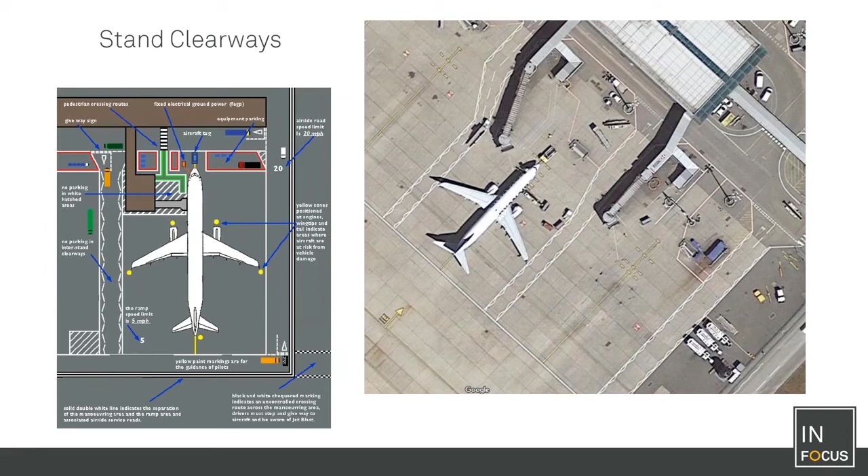So there's always a way to get to and from the aircraft from the side, at least here. This is something I've had a lot of good reports come back about, the advantages of having these routes. Of course, it has done restrictions in other locations.

So just looking at a scenario here, ground service equipment as provided by the aircraft manufacturer. When you work with our product AviPLAN, for all aircraft where we have information, we provide a service arrangement which is analogous to the service arrangement you find in the ACAP, the information the manufacturers give us. Remember, it's just an example, something that can be done, not a must. This is up to us in the planning stage to get the information about what's going to happen on the ground and what vehicles will be provided.

And here this is the A320neo series. There are actually three different scenarios offered in the ACAP, but we're just looking at two here. There's one with passenger boarding bridge involved. Here I've done an open layout where we've got passenger stairs, so it's going to be walk or bus boarding. You'll see they've done the opposite to me here - they've set water to the left of the aircraft and lavatory to the rear.

You'll also see on the right-hand side, not only is dispenser fueling being shown here in this display, which might not be the case at the airport where you're working, but there are container and conveyor belt loading being done at the same time. So you'll see two different types of tow trucks or trains coming in. Here it's marked as bulk, and this is going to be loaded over the conveyor belt. Then I've got container stuff coming in on the LD3 dollies front and back to the high loader or container loading device, which is going to be used at the front and rear of this position.

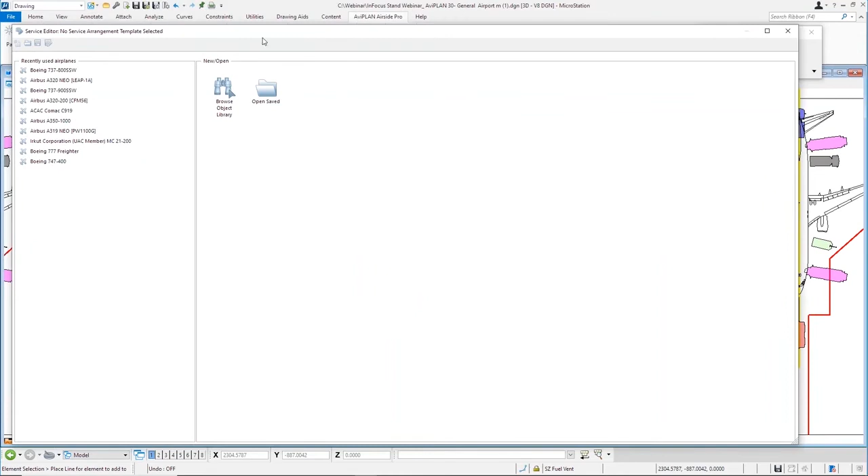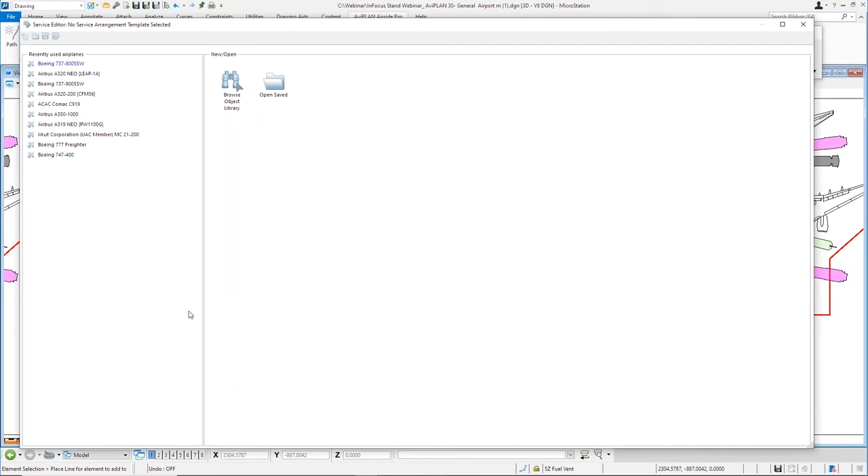And when I open this tool, it's basically like a small CAD environment, if you will. I've got a list of last used objects on the left-hand side here, but I can also grab anything out of our extensive library from AviPLAN. But let's stay with the known object at the moment. I'll select the 737-800 winglet from my list, and you'll see we've built this up based exactly on what we saw previously in one of the slides on the 737-800.

As the standard or a possible service arrangement, as a rule we have both in as standard here. You get to decide - instead of having to search and look for it, we have a compatible conventional or tow-barless truck at the front. If you choose one or the other, I'll remove the tow-barless object there.

When I'm looking at this picture, I also see that here, as I showed you before, lavatory and water are in the same location. I'll just click on this one here and it tells me that's the water, so I'm going to move it. By right clicking, I can just move my water vehicle to the back, and I can rotate it and place it down here and say okay, this is where I'm going to be using my service arrangement here.

I'm going to move this one a little bit further away from the wing, a little bit closer to the stairs. Again, these will be arriving and departing in sequence, not at the same time.

Loading this particular vehicle, you'll see my loading doors shown down here on the left-hand side, and I see baggage trains, each only showing one baggage cart on it, which is usually unlikely if the aircraft's traveling with a full load.

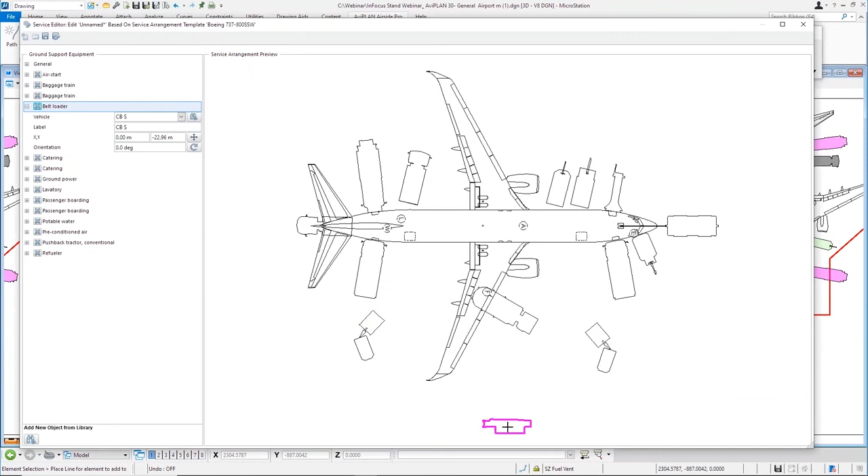There are a number of different belt loaders, manufactured and generic models, in the AviPLAN library. I'll place this in a location and say okay, this is my belt loader in its location for loading the rear. I'll add another belt loader to the front.

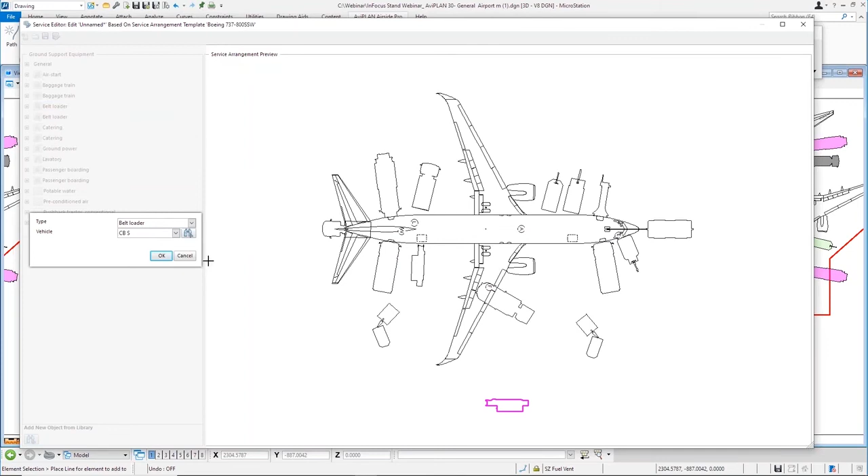I could have selected perhaps a longer one for the front to help avoid the catering situation there. I can still change this at any time, because I'm creating this as a template. I can continue and make variants of this service arrangement, which I can apply to any aircraft in one of my planning scenarios.

Also now here, I'll take a look at the carts, and before I change anything there, I will add another cart to both of those, and I will also change. So I see they're quite wide.

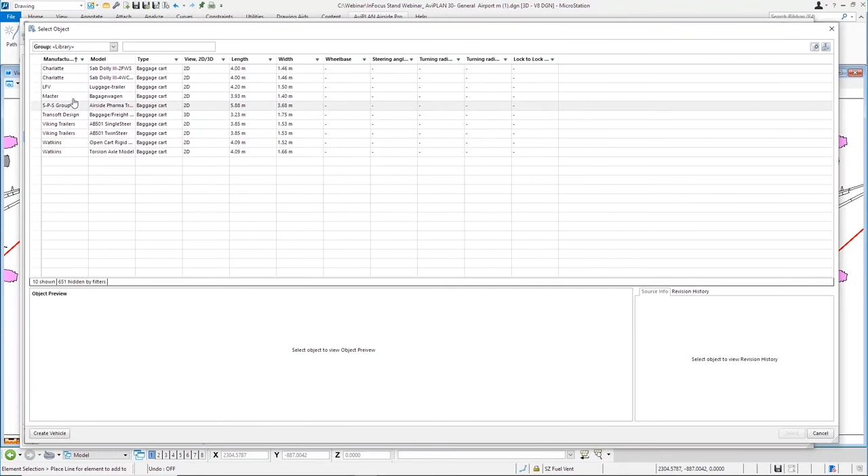Those are probably more likely a cargo dolly as opposed to a cart, which would be a little narrower. The narrowest I've got on my list is this one here. I'll select that and place those there instead.

So these are more typically baggage carts, and I'll relocate that there. I'll leave that one there for now. And also at the back here, for time's sake, I'll just add another 2 to this one.

I can rotate those either manually, or I can enter angles here, depending on how I wish to work, or what I'm trying to achieve here.

Again, I can just drag those in a collective way, move them across and place them here somewhere like this. One last move to rotate - that means 2 last moves.

Depending on the type of aircraft here, you'll see that these are probably, to get in this position, they would have had to come in underneath the wing. Might be possible, might not.

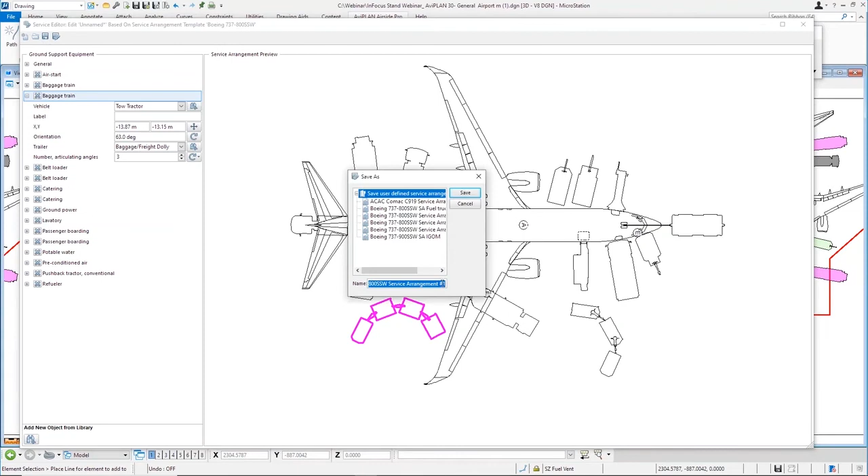So in these situations, when you're planning this scenario, you have to allow that the vehicle, the baggage, will be towed in to a distance close to the belt, and then discoupled or left behind. The tractor will head off, and the actual baggage containers have to be pulled by hand into location. These are scenarios which are difficult for us to simulate with the software, but it's still important that you get this information before you go out and do this type of planning work.

I'll just save that one. I've just saved myself a new template for that. I can use that template over and over again, and I can also share it with other colleagues to do this type of work.

As we say, basically every stand is an individual. Now, you'll see in this screen now on my AviPLAN screen, there's a mess of equipment there.

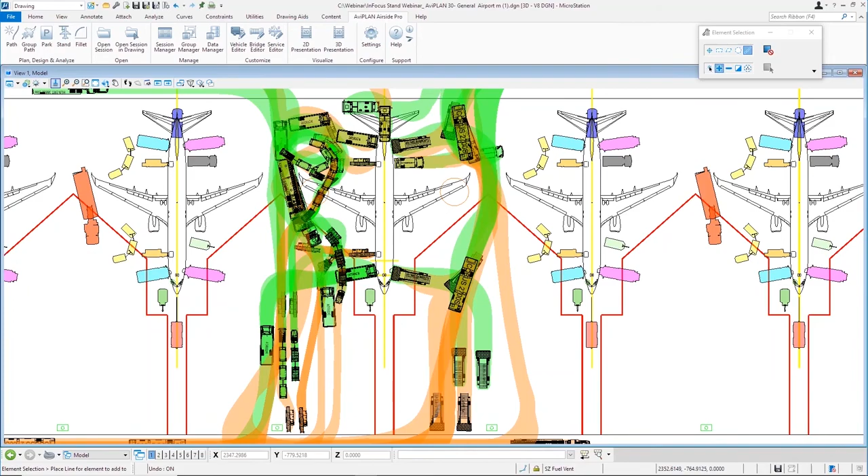What I've actually done before the show was I went to the ACAP again for the Boeing 737-800 as an example, and I took a look at one of these turnaround time schedules as provided by the manufacturer, to give the operator some feeling for how much time is going to be required.

And here, of course, they're just talking about the time, but we need to be able, as the planner, to also check the sequencing of this time. Is the room there? Is the geometry suitable at the stand to follow this time schedule? Can I adjust the time schedule to make things easier and more functional at the stand?

And as I also make quite clear, disclaimer that this data is only to illustrate the general scope of the tasks involved, and it will in every location end up being something completely different.

What I did was I modeled this in AviPLAN following that schedule, and basically it's 99% the same as that schedule which you saw, which runs for about 35 minutes in itself. This is running now, the AviPLAN presentation which I've put together, running at 20 times real time at the moment.

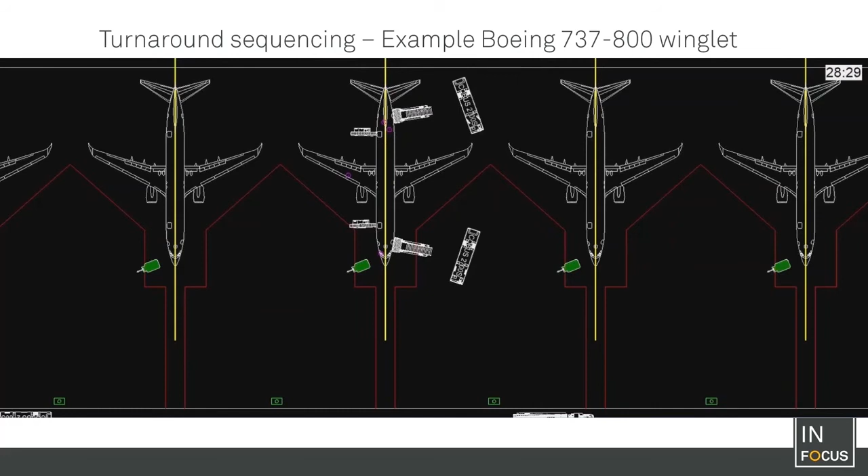You might have noticed that the caterer services both front and back here at this stand. This is quite often the case. Depending on the service which the airline is offering, many low cost carriers don't offer a lot in the way of catering. They only sell cold packaged stuff on the aircraft. Others do a whole different service.

It can be that, because of the distance between the stand and the catering facility, it's a long way, so they're going to send a larger truck so they can service more vehicles while they're out doing that. Make sure you know what size the catering truck is, because this can block other loading processes if they're there at the same time.

When you've done this type of video as well, you can actually slide it around. You'll see this on your screen now, that the videos do bring a lot more than just a nice something to play back. You can watch processes a little closer.

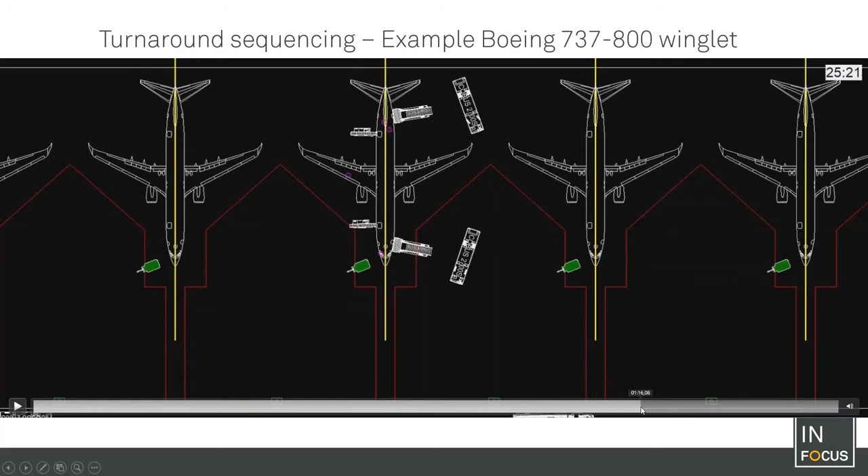This is, of course, now online, not all going to do the way I'd like to have it, but you can use these videos to get a better idea of what's happening, help you design permanent storage areas at the stands, as well as which areas need to be kept clear for maneuvering.

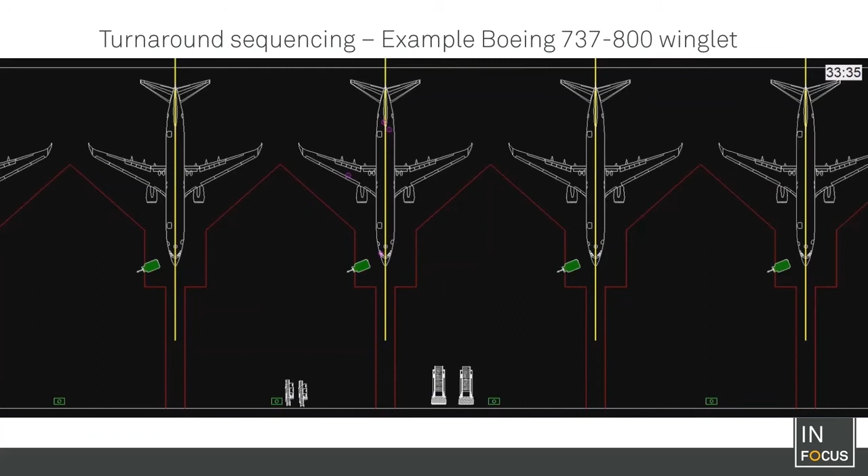And when we look at maneuvering, I want to go forward here, go back to our schedule, which we've taken from the ACAP, and just showing, this is again just to demonstrate to you what options you do have in AviPLAN.

Here, I've just done a screenshot of all of those aircraft, of course, no longer sequenced, only that I've changed the entering paths are shown in green here, the exiting paths in orange.

By doing these movement maps, you can also help identify locations for planning permanent storage or locations that need to be kept clear for movement at certain times in the process.

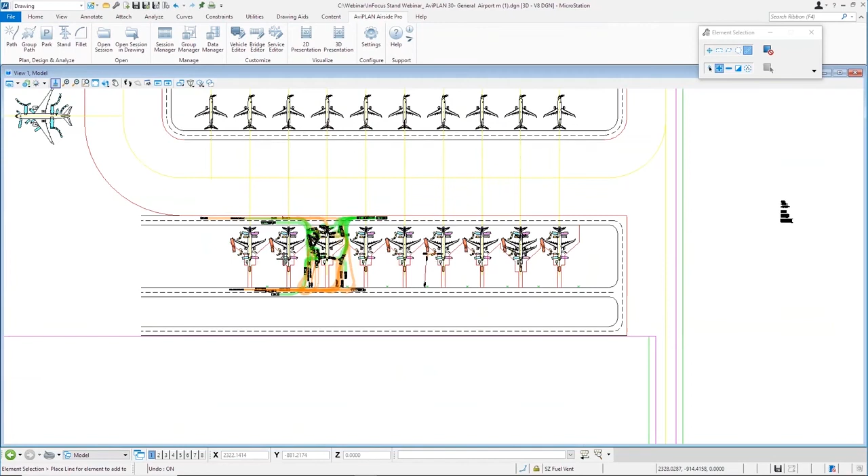To produce that video, though, I'll give you a short insight and some tips on working with ground service equipment inside AviPLAN.

And we'll just do a simple path, the same as what you would with an aircraft. I'll select here a short conveyor belt. It's the same conveyor belt which I've used here, and you'll see that my service arrangement which I created to do this exercise, I've also color-coded the different equipment.

There's also a tip: you can do fantastic things with your ground service equipment schematics in AviPLAN, so that you could do this with color coding, and you could have in your Gantt chart, for example, also color coding shown to show which aircraft or which vehicle type is there, at what time it's arriving and leaving. You can make things a little bit easier for people who are less technically averse in this type of thing.

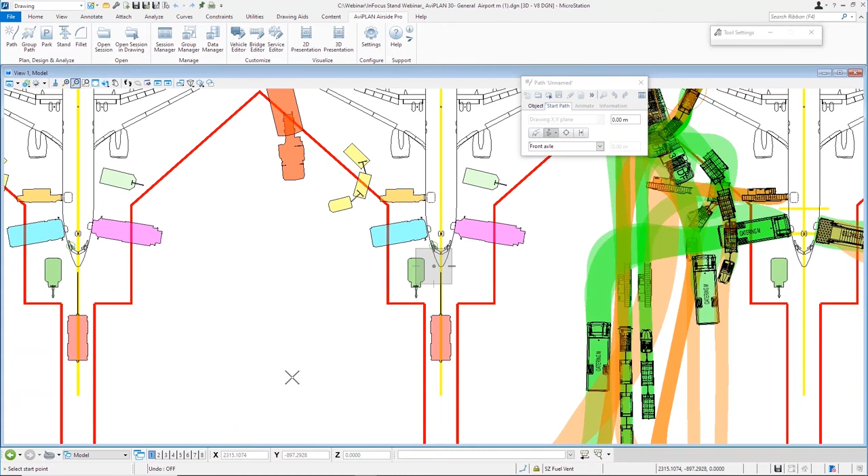So I'll start with this one here, and I'll place the vehicle. Whoop, sorry about the zooming problem here. I was going to place it down here near this floodlight post, because maybe it's an electrical unit that needs to be charged.

I'll come up through the middle of this area, assuming that left and right I've got maybe some permanent storage areas. And you'll see that when I want to move it, it's turning quite a large arc here at the moment. Always make sure you don't need to stick to the default speeds that we offer there. These things are flexible inside AviPLAN.

Okay, I'm just having delay problems on my screen for some reason here today with the web connection.

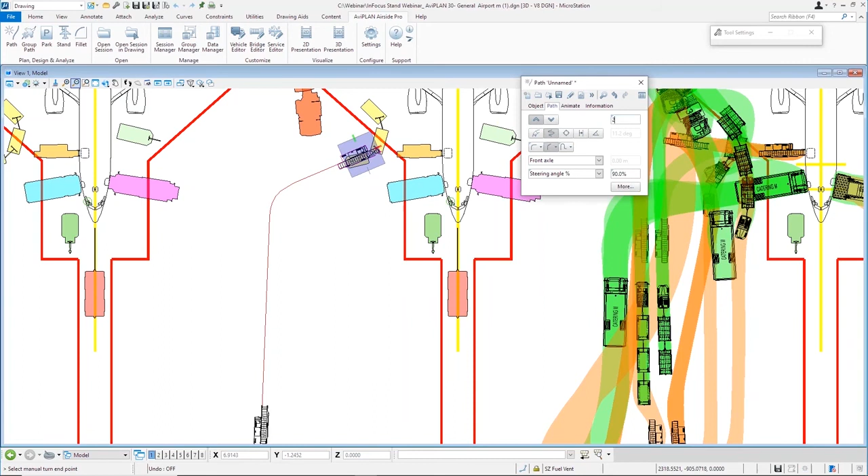So I'm going to move over here a little bit quicker, and say this is my pre-positioning position. This is the belt loader, one of the very first equipment that comes to the stand. From there, I might go down a notch with speed, then zoom in and move over and park around about on the same location here.

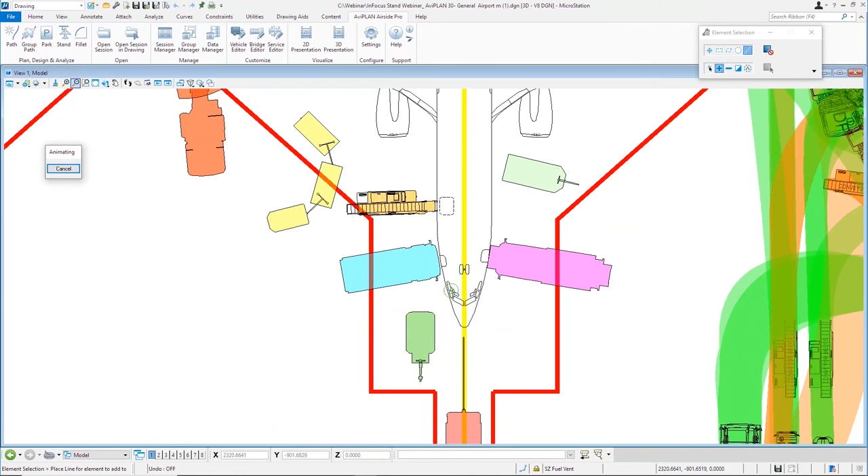There's always going to be slight discrepancies here; this is not millimeter-exact in the planning. So this has brought me into the position, and you'll see that I can also animate that if you want to see paths, and animate just those two segments to show the vehicle move in and come into its docking area. Then it will be serviced.

I could do continue, and when you do this type of work, always just follow the sequence, make one thing after the other, and build it as you go into a presentation. Makes life much easier if you do the whole thing in sequence as you go through it.

For example, I've done this one entering, so I'll save that one and name it 'enter', and then I will directly start a second session.

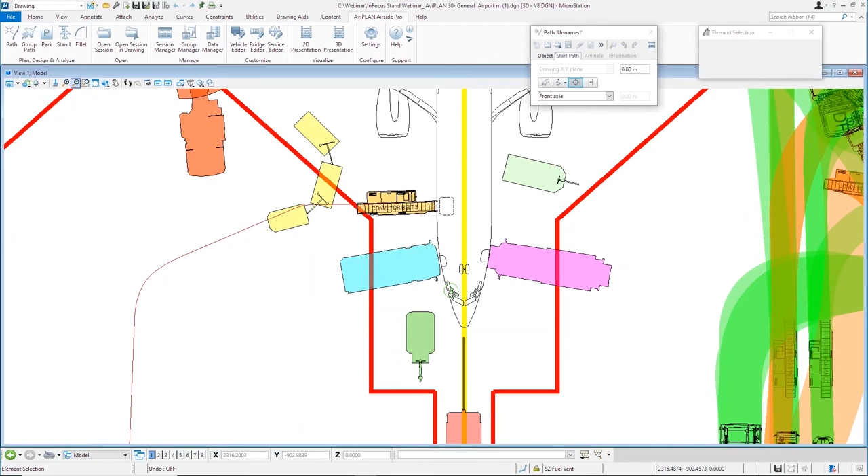I want to start it on exactly the same location as the previous, so I target that one there, and I move in reverse away from the aircraft.

Move straight back away from the aircraft. I will change direction of travel. And again, you see our default value moving forward is 10 kilometers per hour.

So you might want to move away a little bit with a tighter turn. I would definitely slow my speed down, and also take a look at other turn options which we have for vehicles. For example, here, direct turn on the spot.

It's not unlikely that, to move away from this position, to keep away from that caterer, for example, might still be there at the time when I leave the scene, I want to try to turn.

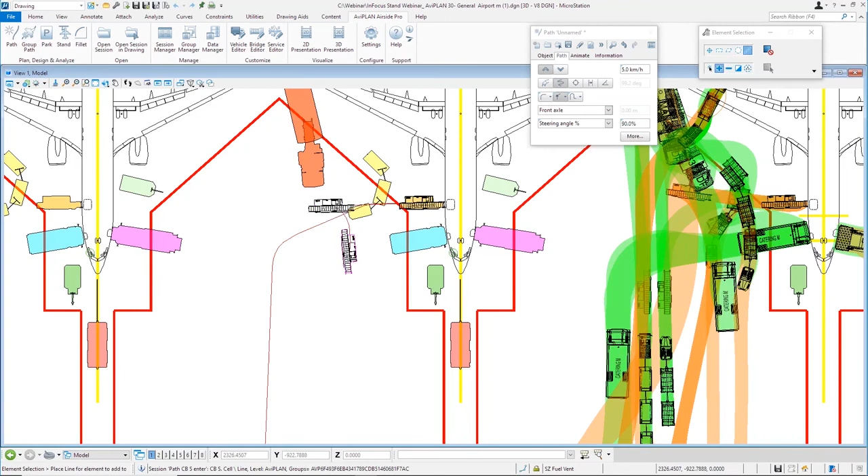Make sure you remember that we have these options to turn on the spot. And if you take a look, I can do a comparison of what would have been if I didn't turn on the spot here.

I'm simply going into my editing tool in AviPLAN. Take a look at this, change this back to the direct turn without turning on the spot, and you'll see that I have a much different curve to the original there.

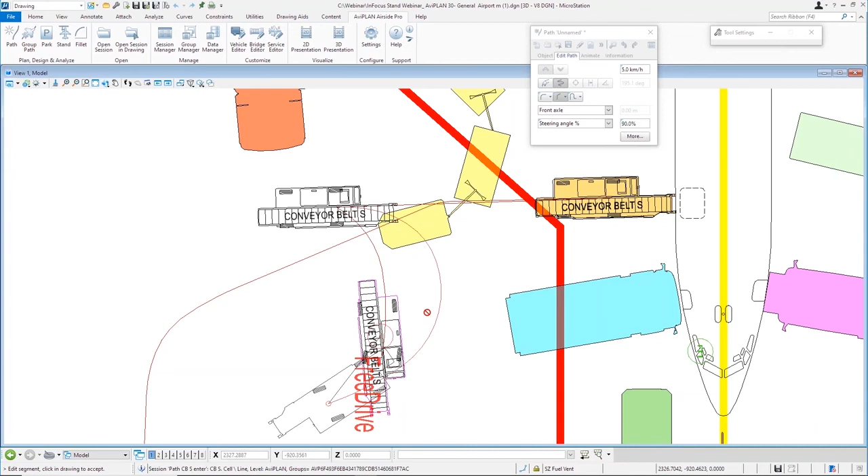I can also continue to edit further, or not edit—in this case, I won't. I'll move this vehicle down, speed up a little bit now, as long as the computer's going to work along with me.

Move down this way, move back away from the scene. I'm not going to go into too much detail here today with that one. So, in sequence, to show this in a sequence—this is the first vehicle which has arrived at the stand.

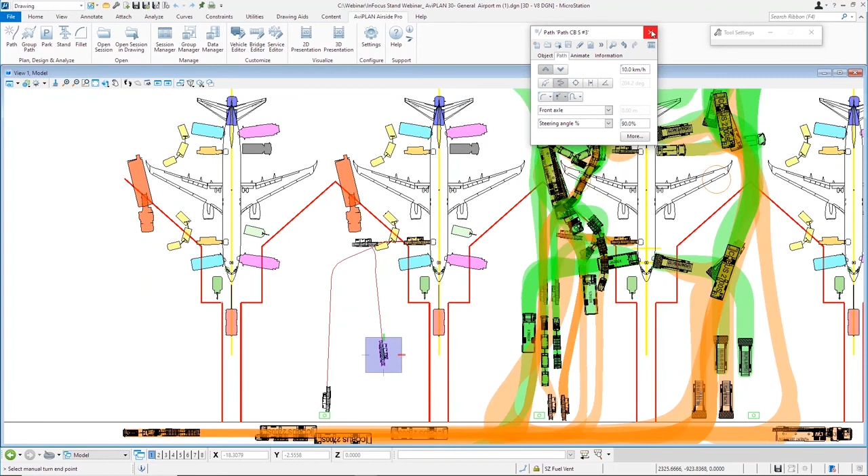My tip is to start building a presentation and just go through step by step. Create one path, add it to your presentation, and then add the next one after the other. We go to the 2D presentation module.

And I go to my path sessions, which are available. I just see that I added this one here, and I forgot to rename my other one. Probably I can put them into separate rows if I like, but this type of thing is much easier when you've done something like this.

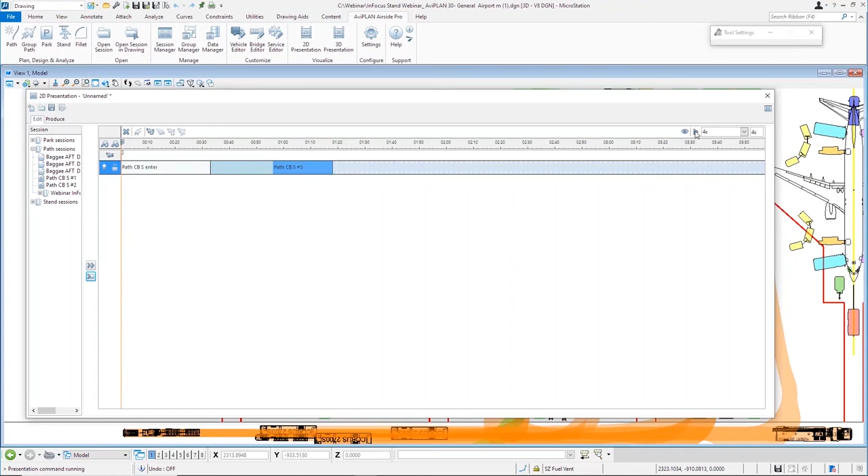So what we just did there now—I'm getting a flickering on the screen right now, so I should have zoomed in a bit better. Hopefully you can still see what's going on because it's not allowing me to zoom right now on the screen.

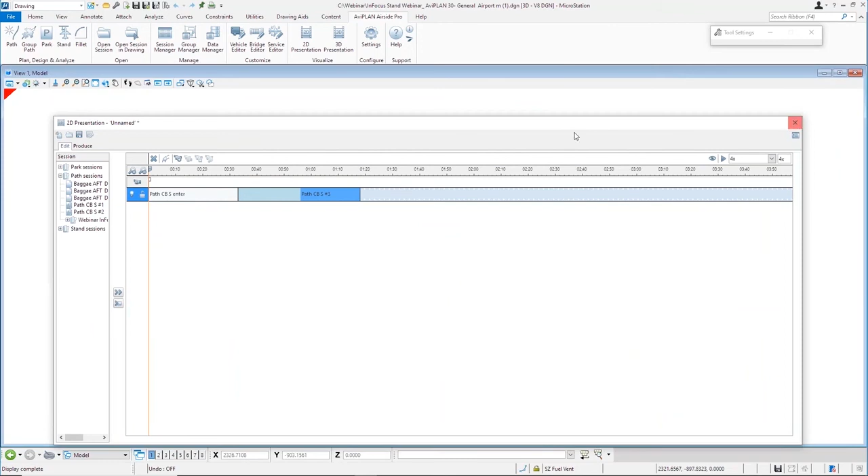Okay, it stayed in there for a while. It's moving back out, so sorry about that flickering. I think it's zooming on me now. Okay, let's just go back and I'll see if I can bring that up to the screen so it probably won't get any flickering. I'll just replay that one for you here.

That's my camera, I need to reset the camera. Sorry, I'll cancel that one.

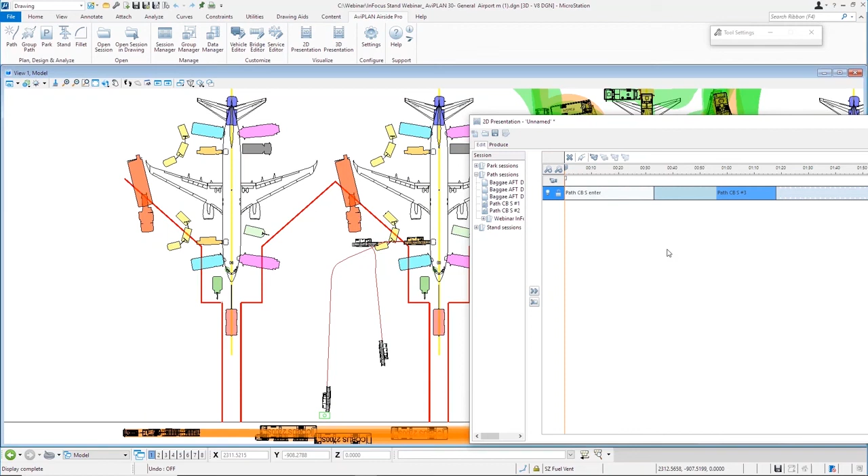I think you've understood what's happening there. But my tip when doing this sort of work is to build it up: build your path, add it to the presentation, build the next path, add it to the presentation. You get a much better feeling for the sequencing of what's happening, and it saves you a lot of time creating the presentation, which can have a lot of value later for analyzing the stand and the scenario, and also identifying problems, whether in the geometry or in the currently planned sequencing at the stand. So I think that's enough said for now.

I hope I've been able to give you a bit of insight into planning for ground service equipment at the stand, and give you a bit of confidence to do this type of thing with AviPLAN as well. I'm open for questions if any of you have any on what I've mentioned so far.

The message I really wanted to put out there is that you can do a lot with AviPLAN. You can do a lot with the movement of these vehicles. You can integrate it all into your planning, but if you don't get the right information up front, right through the process, you need to find out who's on the ground, what equipment they're using, what processes they're following, what goals they're trying to achieve, and then you'll be able to help them get there.

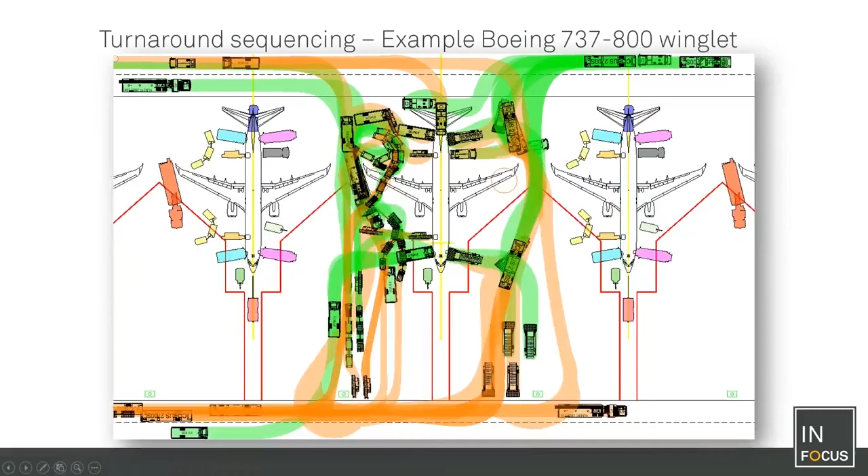You'll notice, and I'll just flick back through these slides here a bit... whoops, went too far. You'll see that actually Boeing, in what they've offered here, the potable water service is being serviced at an early stage. Although the operation manuals from IATA, which is actually a much newer publication than this one from Boeing, do say to do it at the end.

And it's all part of lowering the risk of contamination, I think. So there's more chance that nobody else is around when the potable water is being refilled.

Are there any plans to include conflict analysis in the maneuver module for AviPLAN? Patricia, we have added that already in 3.0 for aircraft. So with our new group path tool, you can define in the drawing layers in the CAD drawing which are to be considered for conflict, for example pavement edge, or your movement area delineation lines, and stuff like this. You can also now measure or detect conflict with these, so the technology we already have in AviPLAN. Of course, that's not going to be a problem for us.

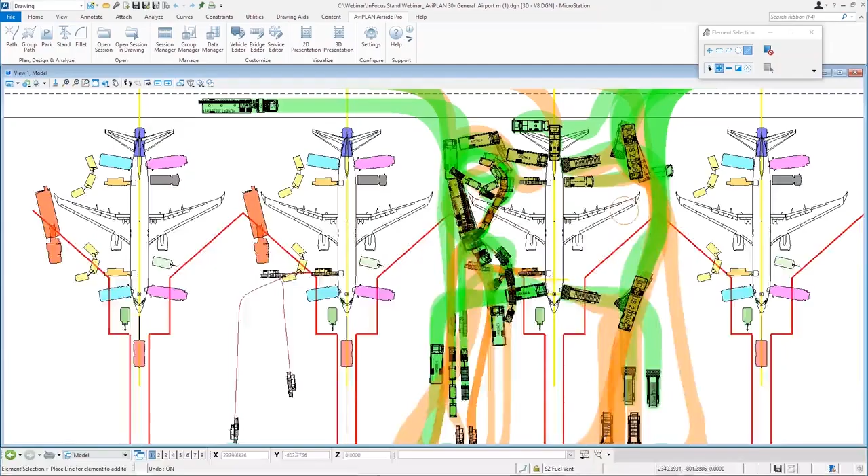You don't get an automatic fuel pit location, but what you can do, I'll zip back over to the AviPlan situation here, and if I move out here, I might have something we can take a quick look at. At this particular stand location, you'll see... sorry, this might be a bit slow to react here.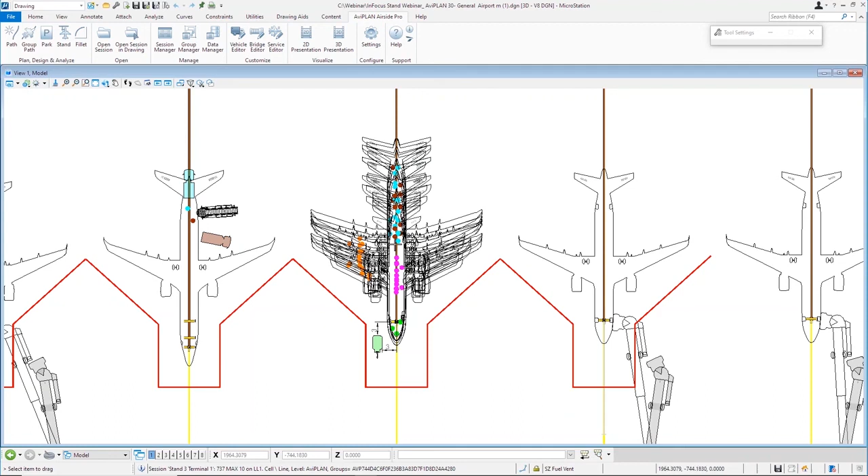Here I've got one of the scenarios you saw in the other screen, one of the screenshots. What I can do in a scenario like this is, okay, here the stand is open now. If, for example, in this scenario, I would set this over to a fully automatic positioning system.

This AviPlan will rearrange. I'm not too sure, I haven't switched the bridges on.

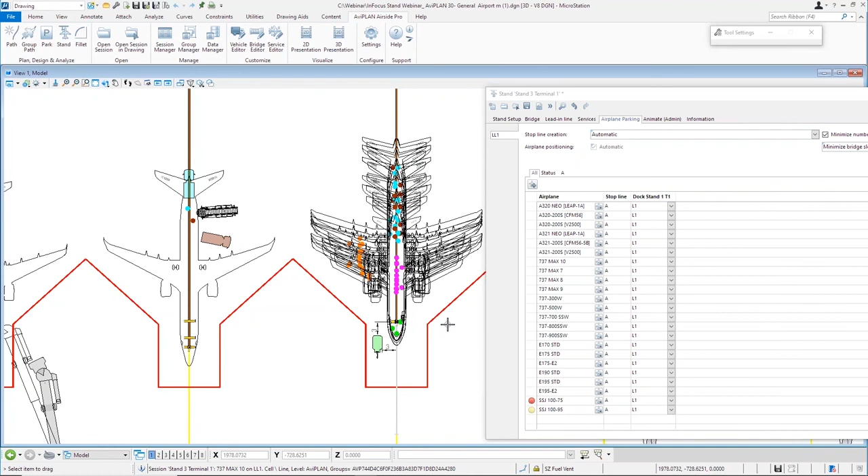What will happen is, if I add services, for example a fuel pit, I can add to this session, and you can see I see my operating area as a radius. By moving this, I can place it in a location where I encompass all of the fuel ports and avoid the engine area. If I place it, because I'm set to automatic, AviPlan will also ask if I want that considered in the planning, and because it's set fully automatic, it will, if needed, rearrange the aircraft to make sure all fit inside the area I've now decided myself.

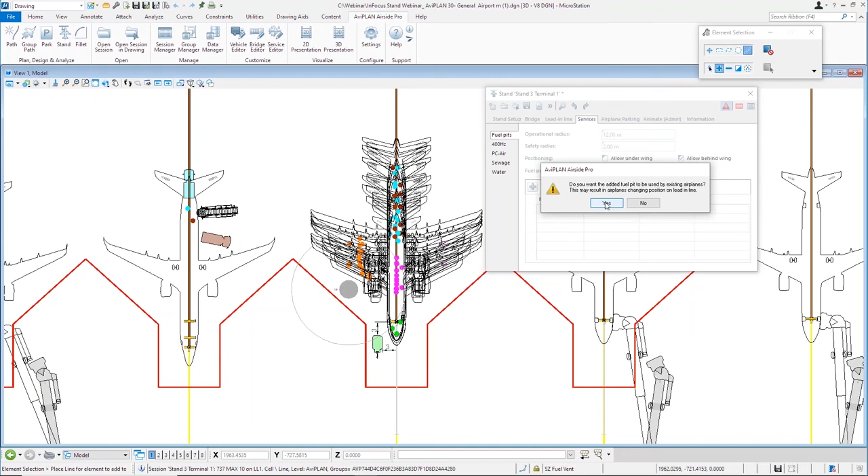This is also an iterative process. I can go ahead and say yes, this won't, because of the layout here, make any changes right now, but it won't decide the spot for you - you decide it based on geometry here, and AviPlan will then ask if you want it to make any other adjustments to the positioning of the aircraft based on that location.

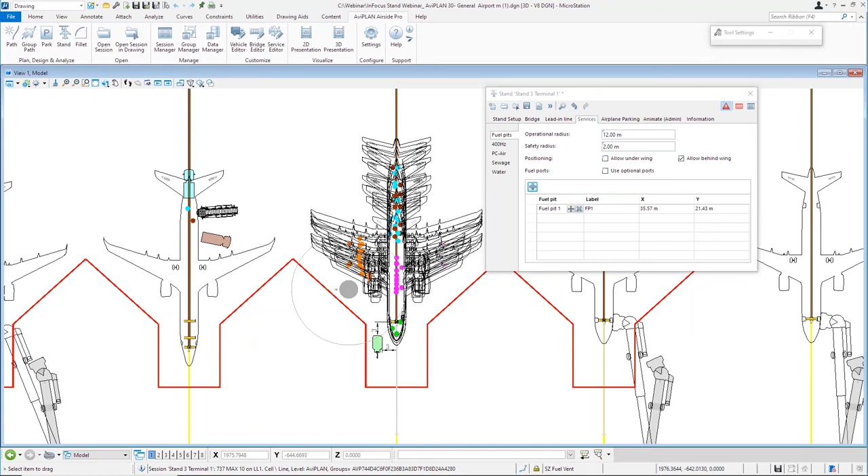Okay, so Isolde, that's a very similar question. Will AviPlan one day suggest positions for ground connections?

Perfectly possible. We do it the other way around at the moment. You place the fuel pit, and AviPlan arranges the aircraft accordingly.

There are different scenarios. If you're working at an existing location and the fuel pits are already there, you don't have much option. But if you're planning something new and want to create fuel pit locations, it's a much more successful task doing that with AviPlan, as I just demonstrated, by first arranging the aircraft so they're best suited for the passenger boarding bridge situation.

Then adding a fuel pit which encompasses all of the available area, and if it doesn't, AviPlan will readjust the aircraft to suit what is possible. So there are different scenarios you can go through with AviPlan, but it wouldn't be such a problem for us to do it the other way around, to say AviPlan calculates and says this would be a great spot for the fuel pit. Again, something we should think about.